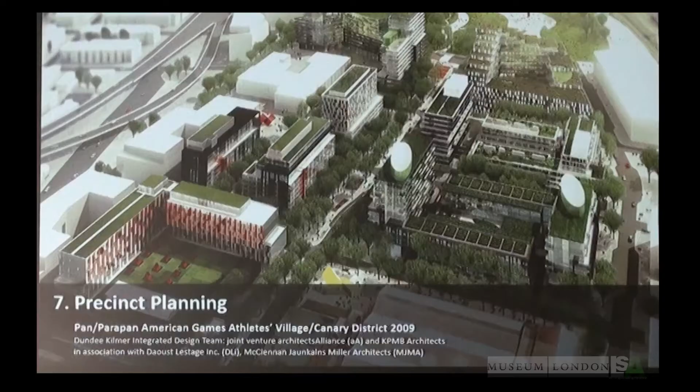We handed it over just last week. This is housing for 8,000 athletes coming to Toronto for the Pan American Games and the Parapan Games, which will then transition from athletes' housing into market rental housing.

George Brown College's student residence is this building, alongside market condominium buildings, which Toronto has so much of. The difference is this is fairly mid-rise compared to everything else. It's on Front Street and goes to a park, which is really fantastic—totally completed, Corktown Commons, which provides flood control from the Don River to the north, set within a series of blocks which we did not lay out.

They were laid out by others, and the public realm was designed by Greg Smallenberg from Vancouver, who's excellent—he did Vaughan City Hall. Renée Daoust, who's fantastic, from Montreal, was there. And we partnered with architectsAlliance, who did this building, with MJMA, who do the best recreation centers.

So we just put together, we curated the city we really want. And it's under construction—two heritage buildings, it's a brownfield site. The Canary Restaurant is there, and the other building is the C&R building, which will become a retail piece. The red frame is the Polyclinic, which will make a natural transition into a YMCA for the community. And the developer is subsidizing the retail because people are looking to buy into communities. Otherwise, the retail space will be empty forever.

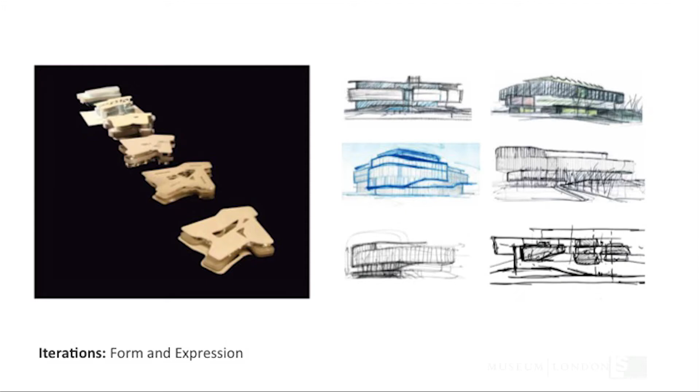These are all the different stages. The lake is out here. These are different sketches, some had berms. Actually, Peter Bohlin did a scheme like this. We were the only scheme that didn't have a 5-story atrium. By the size of the site and by the program, everybody was doing a 5-story building.

I asked them, what is the difference between a corporate headquarters and a school of management today? So the 4 buildings, this was our idea, that you would arrive from the west, the lake is here, you would see the lake, and you'd come to the middle, and you'd see Chicago. There's a line of sight to Chicago. There'd be 4 buildings, somehow you'd connect them.

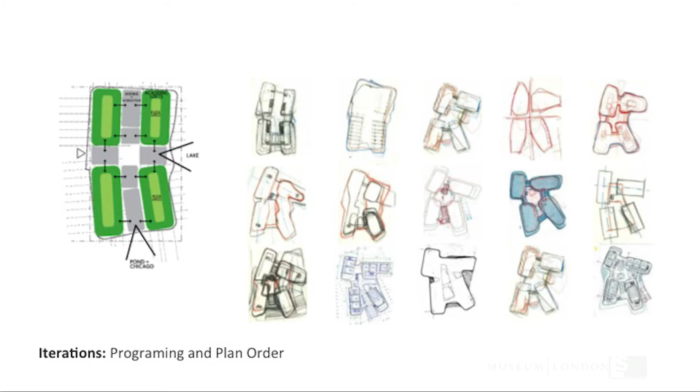We called them academic neighborhoods, so we're kind of using all these urban metaphors. And then you'll just see, we're just going round and round and round and round, looking at different ways to position and articulate them. Some of these are kind of nice, and some of them are kind of gawky, but we kept going round and round and round.

But essentially what we did is this is the line of sight to Chicago. You entered from the west, and there was this arena in the middle. I always speculated that Obama from Chicago would be giving a talk here. This is where you would get CNN doing a debate. It was about debate and confrontation. This is like the parliamentary system.

Every building implies a city. Every building is a construct. I'm more interested in architecture as a social construct than anything else.

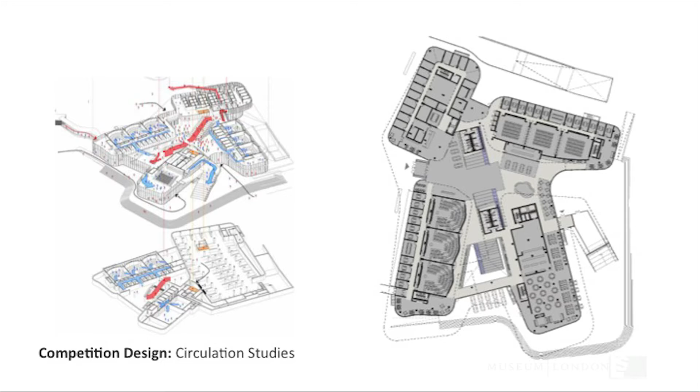There are 4 academic neighborhoods. We had, and I'm showing you 2 versions of this because this is what happened, we had classrooms here, and you'll see everything changing. I want to show you either the compromises or the skill we have in moving from point to point.

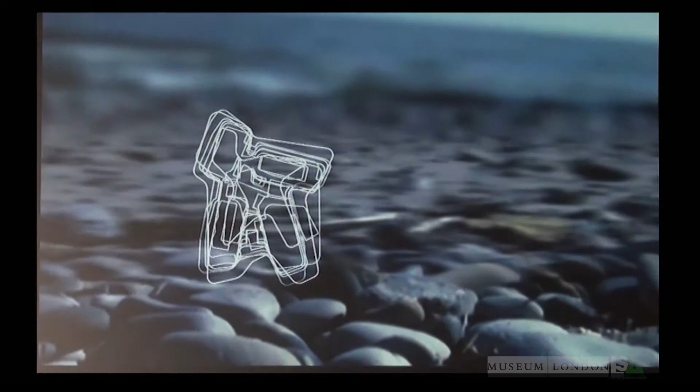We made this video in the competition. This was at our third interview. These are the rounded pebbles, or anything will get rounded out by water.

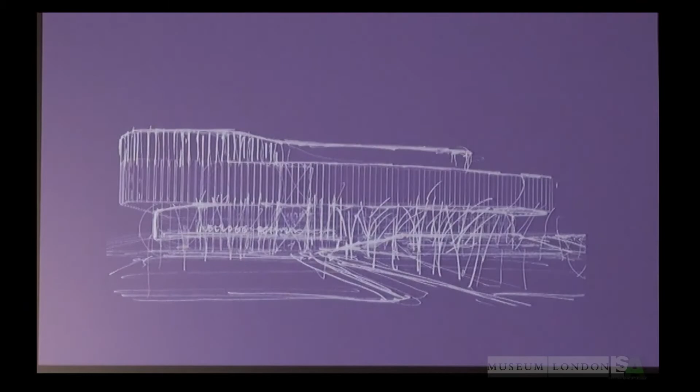We knew we were doing well because when they had 5 architects, KPF was always presenting last. In the first go-round, we presented second. By the 3rd interview, we were presenting 4th, so we knew we were in 2nd place.

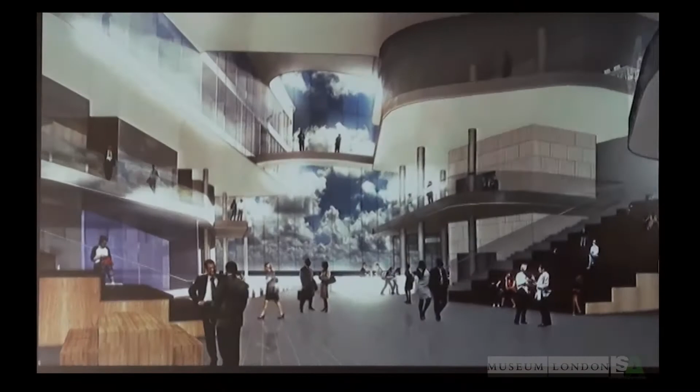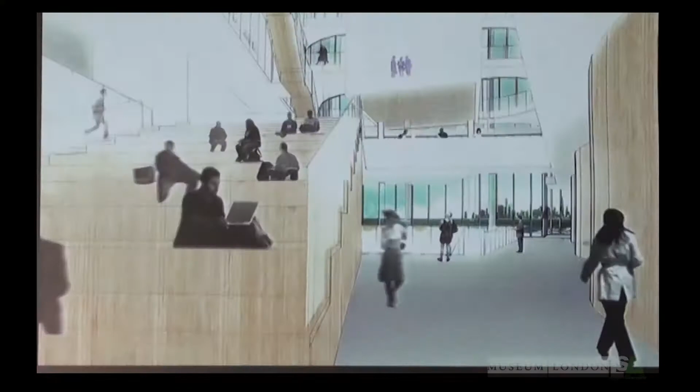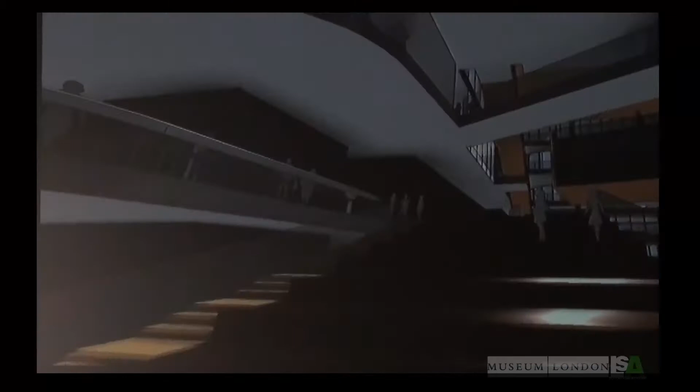It's interesting because they had so many faculty offices, like maybe something like 250 of them. They're all tenured faculty and they all want a view of the lake. And this plan produces a huge amount of perimeter because it's really 4 buildings and they're cinched into the middle.

This is our version of the Rotman, but the difference is it's all glass and you can see Chicago, and they wanted to use this in both directions. This is a model we did with an apron around it, terraces. And then I had the idea that it was like an Italian hill town.

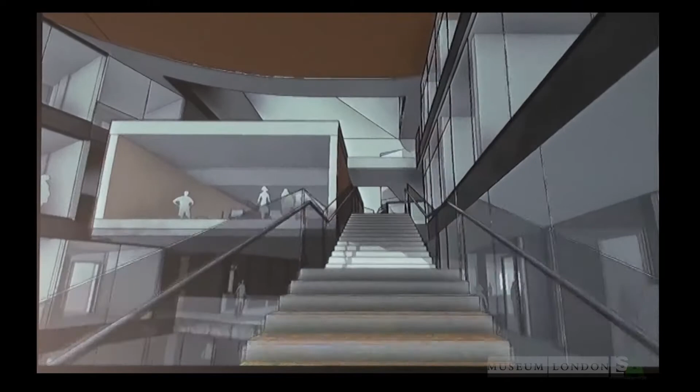After Rome, we went up and looked at some hill towns, and then the faculty said, you know what, we actually don't want students up on our floors. That's great, thank you.

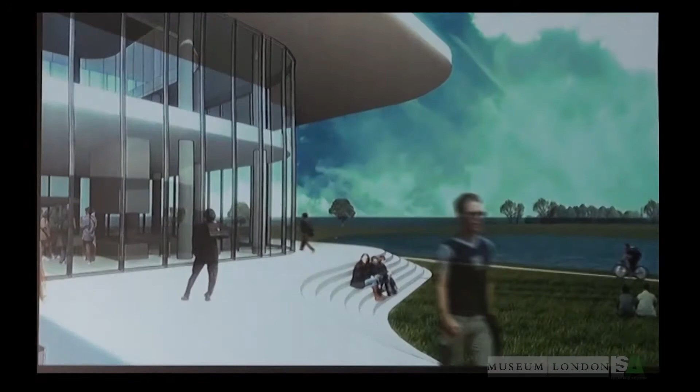These are the atriums that are in every neighborhood so that there was a sense of the local. One of the things that the corporate architects did is they made one big atrium and then nothing else. They have office in an atrium like a corporate headquarters. I said, there are many other places in any daily routine that you have to have. You can't just be in the atrium.

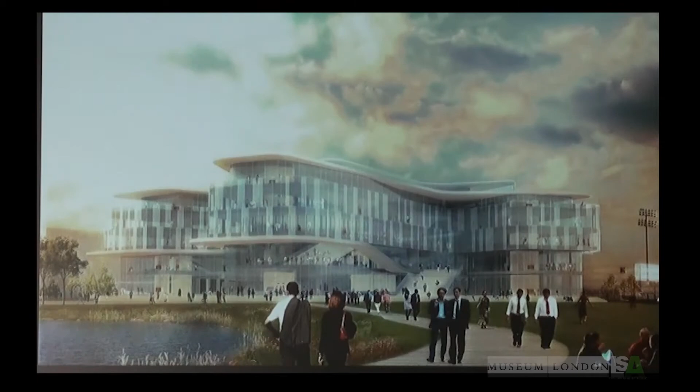So one of the guys who was doing the decision making is Gordon Segal, who's the CEO. He just stepped down from Crate and Barrel. So this was our scheme. You know, what is it?

They had an expression, intensively or excessively public. So the lower floors were excessively public, and the upper floors were faculty floors. So there was one floor in the lower level, and we got light to it, then 2 really big classroom floors, and they have other admissions and things like that. And then the upper floors were faculty, and there was a faculty commons because you had to bring those people all together. They wanted their own forum.

And that was our rendering.

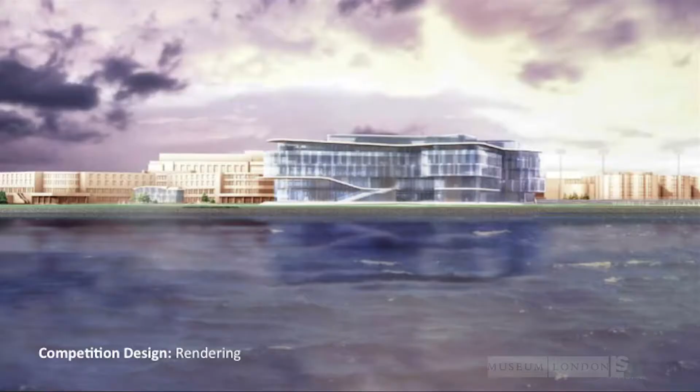This is the Allen Center, engineering, and it's 5 stories. And it had this really beautiful stair, it was a stone stair, and it was taken away in a blink. Just in a blink. It lasted about a month.

Then they called the next phase the fresh start. If anyone says that to you, you should really think about it. Don't accept it. But the fresh start meant that at the last interview, Gordon Segal saw the video and said, 'I really like the way you think.' He didn't say, 'I really like your design.' He said, 'We really want to work with you and your team, but we want to start again.'

So the next thing, and remember, they're Americans and they're in Chicago, and everything is big and bold in Chicago. It's just different. This is the Allen Center.

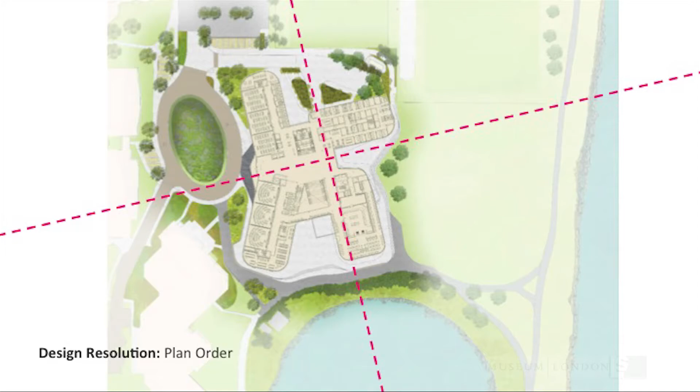They removed the parliamentary stair. That's what they did. First thing, why do you want that? You're blocking the view to Chicago. Be flexible.

They moved, all the classrooms came to this side. They wanted the presentation to the Oval to be the classrooms of Kellogg. And who was I to say no?

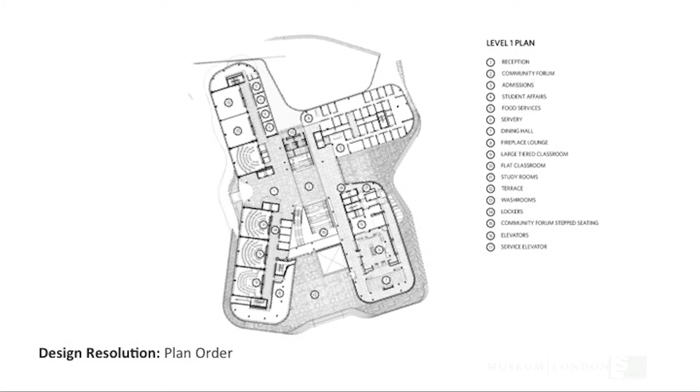And then you enter here. There's a lower level. There's a sunken courtyard here facing south. The cafeteria and dining room is here. At the ends of every loft are these stone elements, some of which have fireplaces in them, looking out to the lake, and there are lounges and study areas at the tips.

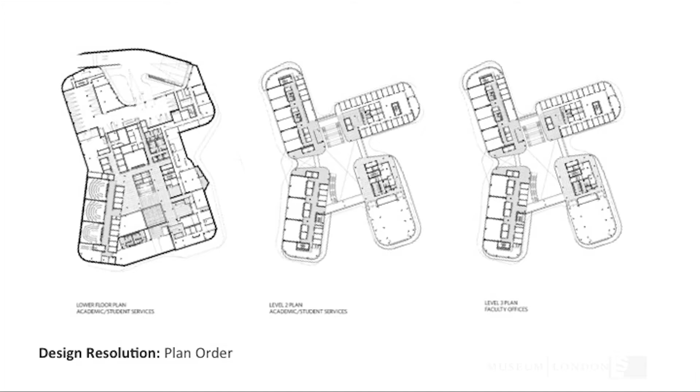And then, the service court, some lower level classrooms. This is a light court. There's a cafe that you'll see later. The 4 lofts have the idea that they would be bridge linked together. So there are bridges, but you leave your neighborhood and you go to another neighborhood.

This is an odd looking section because of the bow tie. It's like 2 bow ties, and it's very short, but this was from the competition where they then took this - well, no, this was what we're actually doing.

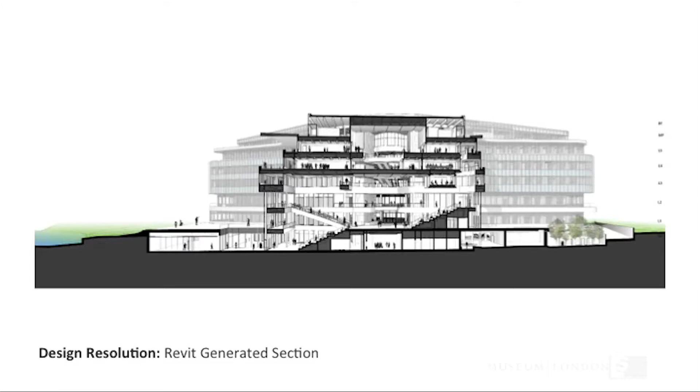This one is in elevation. We still have a stair, slightly curved, you're looking west. This is the south, there's the pond. This is below grade. And then upstairs you get these figures of these kind of courts. These things are in the clerestory, and they're bringing light down. All our mechanical is up there.

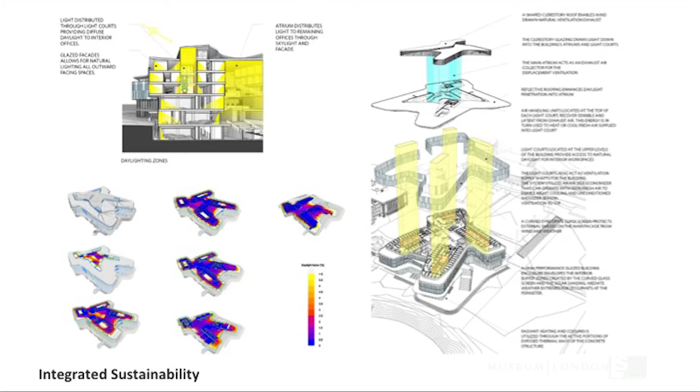So there's another figure, this piece. Sustainability has a lot of great daylighting. It has geothermal, it has a radiant slab for heating and cooling. But they're not as adventurous as Manitoba Hydro. It's odd, very conservative. So this is our building today.

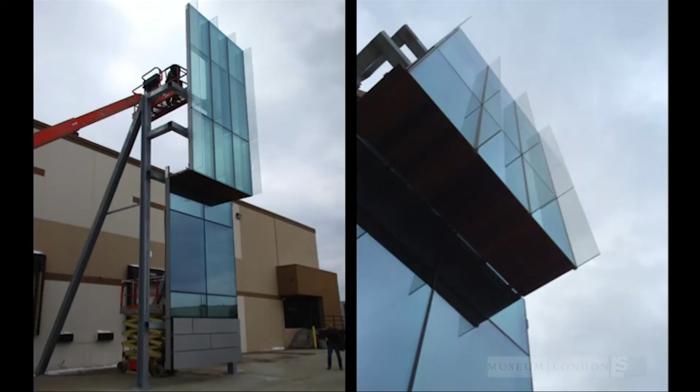When they have federal politicians come, congressmen and stuff, you can't get onto the oval. It's all security, and so this is our mock-up, which was in Indianapolis. This is the lower part, this is the upper part. So we just did a test in Fort Lauderdale, the technical test.

So this is the second video, which is very recent. This is where we are.

So you can say, well, did they compromise? What is it? What happened to all those? All the Chicago guys, they took away all of the loopy things. They took away the big stair, and they disciplined the building with us. And we got to, I think, a very good place with them.

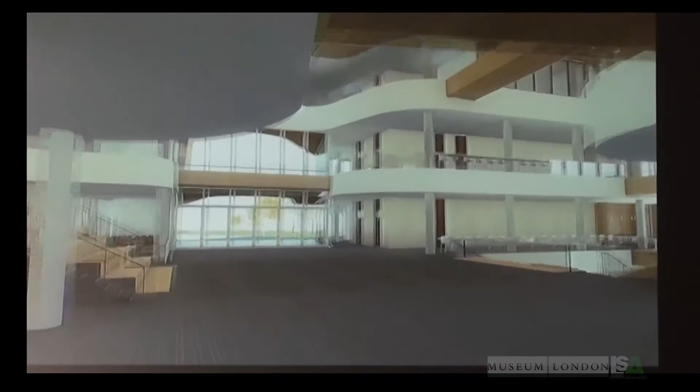This is coming in. You see the lake? The stair doesn't block your view of Chicago. Looking back at the entrance, you get all these innie things going on, and there's some interesting interreactions. Basically, the buildings, the lofts are quite rational. They're gridded, but the corners and the perimeter aren't.

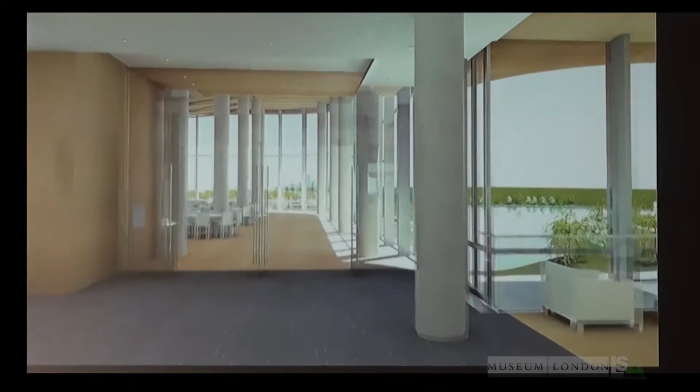We've never done anything like this. This is outside of our line of architecture, but I think we've earned the right to do this building. And I think it's going to be very, very exciting. There's a lot of great space in it. We said our motto was great space everywhere.

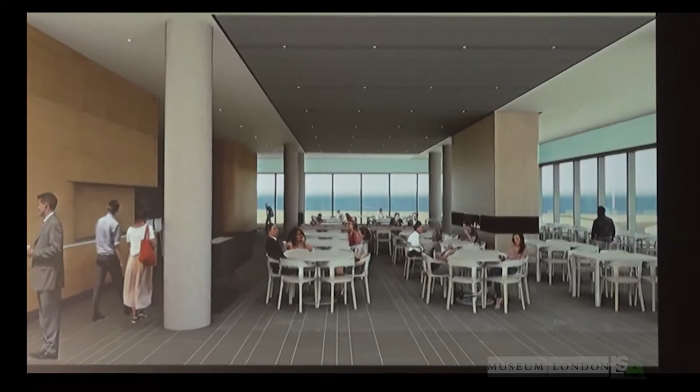This is their multi-purpose hall, which can be used in two directions, either towards Chicago or across the room. This is their cafeteria with the fireplace. You can eat on both sides of the fireplace.

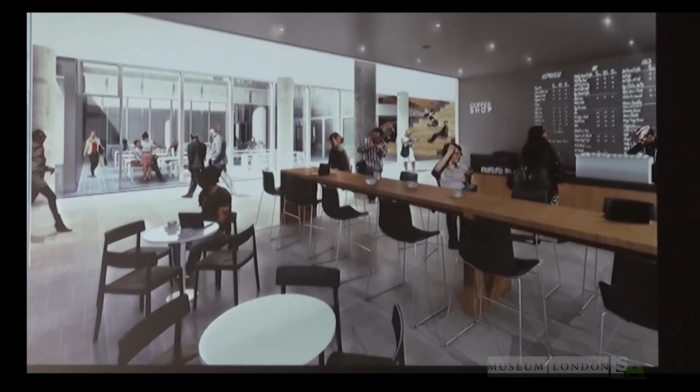Lower level with the open court. And then this is up on the faculty commons, where they don't want students to come. But all the faculty offices, it's like the crossroads for all faculty coming out of the 4 buildings. You can't get to the elevators without crossing. And then you get some neat innie spaces, like harbor type spaces.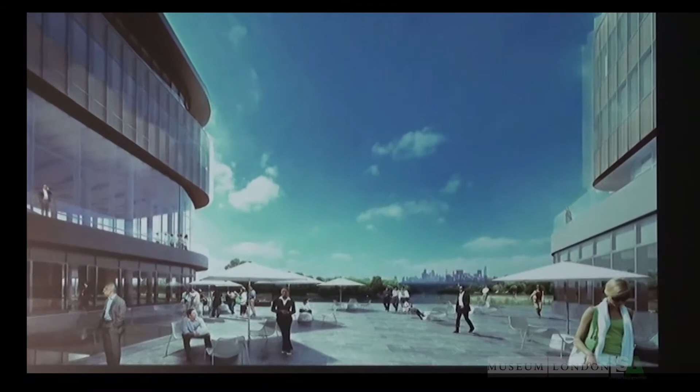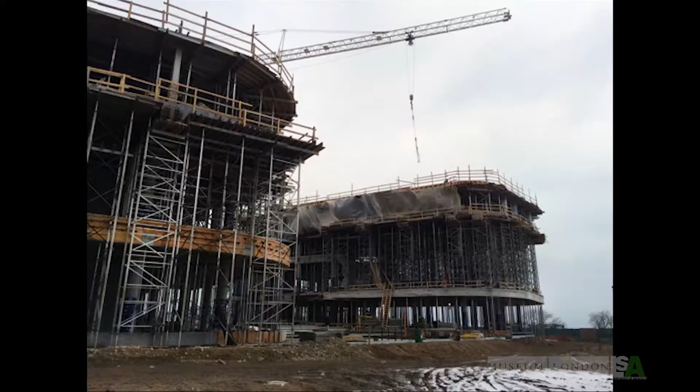And Chicago will always be there. So that's number 1. These are some construction shots. And now we've been asked to look at making additions to the Allen Center and connect it to the pond.

Okay, second project is - miraculously, I got a call from the chief architect from Princeton University, and he said, we're interested in having you compete for a project at Princeton. And there are 3 projects that you've done that we think are relevant to Princeton. One is the Canadian Museum of Nature. The second one is the James Stewart Center for Mathematics at McMaster. And the third one was the Gardiner Museum.

And the way it works is they're so focused on what they want. The president of Princeton was a Canadian, Shirley Tilghman. And at the interview, she welcomed us. She was very open, and she said, I was in Toronto and I went to the Gardiner Museum, I just want to say it's a beautiful building. And she presented us to the vice president, provost, all the project managers. And that kind of lowered the threshold for us.

So this building is the little magenta dot. Princeton is one of the great institutions in the world. This is Nassau Street, this is the campus, goes right down to Lake Carnegie. They own the golf course, they own this, they own the other side, all the way out to the highway. The high point of the campus, it's a river - it's like, I always thought it was a river, it's a lake, but it's sloping up and it crests about here. This building and plaza, this is the Scudder Plaza, and it's where Minoru Yamasaki, the World Trade Center architect,

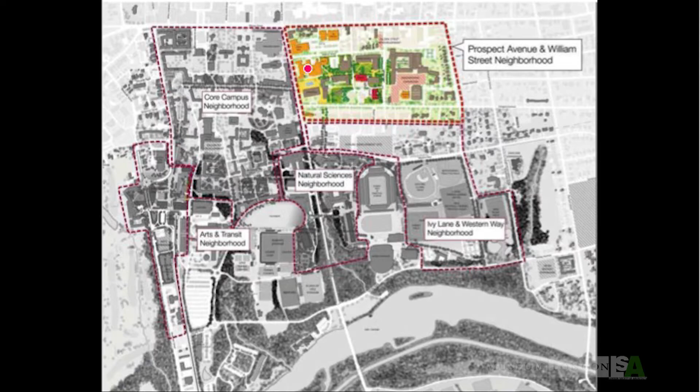Okay, so then the outlier is this Minoru Yamasaki building with this amazing piece of sculpture in a pool. But what do you think he was thinking about? I think he was thinking about the Acropolis. This was a time maybe like a kind of Lincoln Center, that kind of classical modern with these tall forms—it's actually really beautiful, architecturally really beautiful.

Woodrow Wilson School should—these are Ai Weiwei's zodiac sculptures. So Princeton sees art in the landscape as kind of placemaking and wayfinding. But the art they have, it's not just any old art. I mean, this is an amazing piece by one of the great artists of our time.

Our building here flanks onto it, and there was a long continuous bench and magnolia trees here. And this is part of our building. This was the original 1929 building, and this is a 1960s building. There's McCosh Hall, and the chapel is just on the other side, so it's extraordinary. But there was a divided world because of this wall, and it's a beautiful bench—the profile of it is so beautiful.

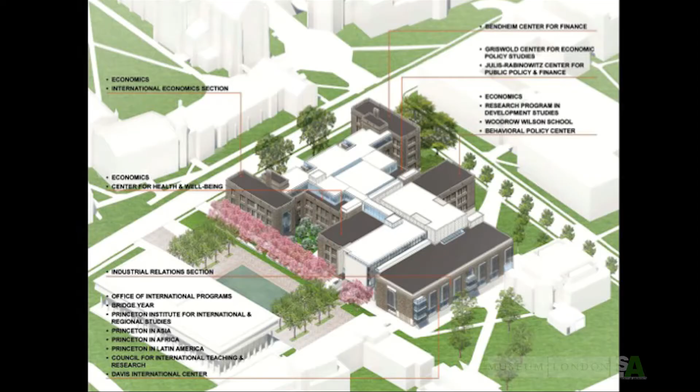So what we did is we were working for economics and international initiatives, and they're completely different. What I've learned with economics departments is they want to be in a silo. At every university I've worked in—we work at Pennsylvania, we work at Northwestern—they want to be amongst themselves, they don't want to actually connect with anybody else. We want them to connect, and we want the university to move through it. I think that's what a university is about.

The international initiatives got this piece of the building, smaller, the modern wing. And this building is very classical, and then it starts to break down. And this is Shapiro Walk. This is the whole zone where Michael Van Valkenburgh—this is a good example where the landscape architect made a significant intervention that will change the campus.

And then we went up top and we said, well, we're going to expand on top, we're going to fill in this. Their master plan said take out the lecture hall that was, I think, done in the 70s in a courtyard, get rid of it and think about something else. So we took off all of the heavy penthouses, which were for lab exhaust, and we then have our own mechanical penthouses, which are much, much smaller.

So there's heritage, there's campus, and I read this as the campus as a whole—the heritage piece was here, and as you go east and south, it got more modern. In fact, you get this proto-modern thing here. And we're saying, let's make a connected world. The plan looks, you know, in a way you'd say that's a really boring plan, but it's actually really, for me, really beautiful where everything has, I think, a natural fit.

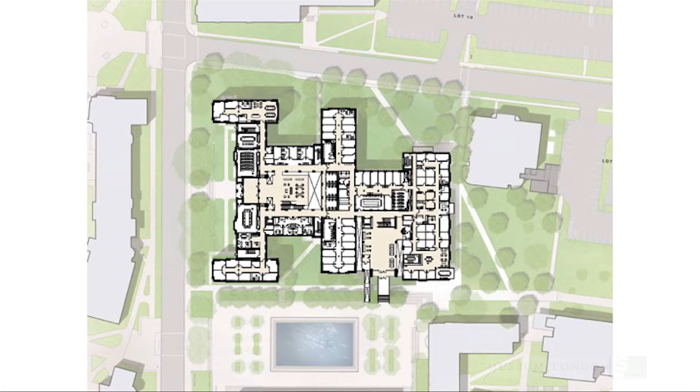There are two atriums. This is international initiatives, very outward. Economics is very internal. And then there are heritage rooms in here that we had to deal with, and it gets more modern, more modern, more modern. It just gets more open. So for us, it was a discourse on architecture across time.

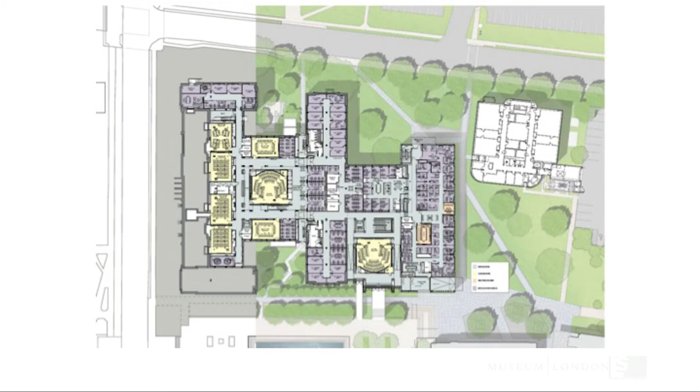This is the lowest level. So the last floor was up at Washington. This level is down at Shapiro Walk. We took out a bridge here to unplug this because this is going to be more of a pedestrian through route, because you can go up to Nassau where all the restaurants are. We actually bridge over this, which was pretty moat-like, and then you'll see that we're actually bridging over this and going into our international initiatives, because this is the one that gives us the link to the Woodrow Wilson School.

And then we have three glass pavilions. These are the heritage chimneys, and the ends are raised up, but it's really beautiful.

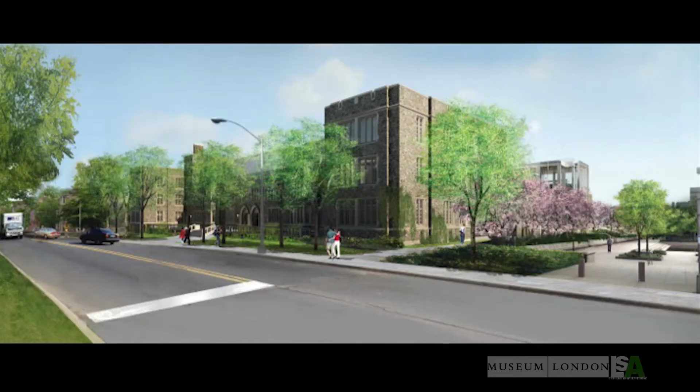So in these rooms, this is the building, so these are just studies, but these were the magnolias. We were accepting this, we thought this was totally fixed, you can't change it, it's the magnolias. The landscape architect who has oversight over the master plan as well said, no, you can change it, in fact, it's a good idea and we're gonna change it. So they took out this wall, they cut down the trees because they had fulfilled their life cycle, and we thought there'd be a major protest, and there wasn't.

And we're connecting over this, so this is open now to Scudder. There's still a retention wall and there'll be seating. This is our new atrium piece. These are all redone, the heritage building. Economics are really happy now, which is what I want them to be.

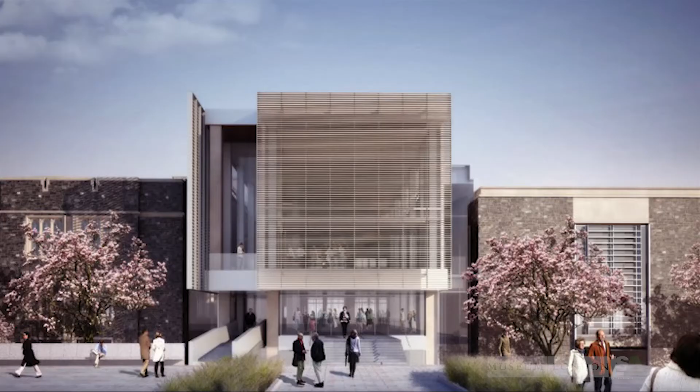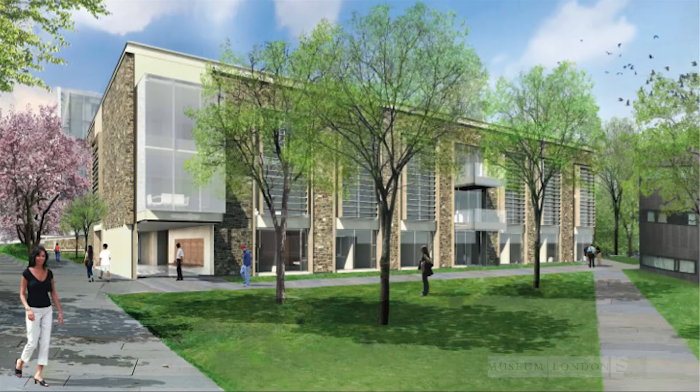This is our entrance, handicapped access, a big stair, and these are stone. This is like what we did at the Gardner, but you're basically facing south, so we're trying to do a kind of screen for that. This is a 1960s building, and this is Argillite, which is a kind of purple and gray - Princeton's got a lot of this. And all we did is try to clean up the facade.

We removed a 1990s addition by Payette, who are very good architects, but they did a very bad addition to the 60s building for chemistry. It was about 10 feet wide and had work areas for researchers. We just stripped it right off, went back to 1960, cleaned it up, made a second entrance off of Shapiro Walk. This goes through and changed the stair. Michael did this, changed the stair up to Scudder and tried to make this a real intersection of convergence.

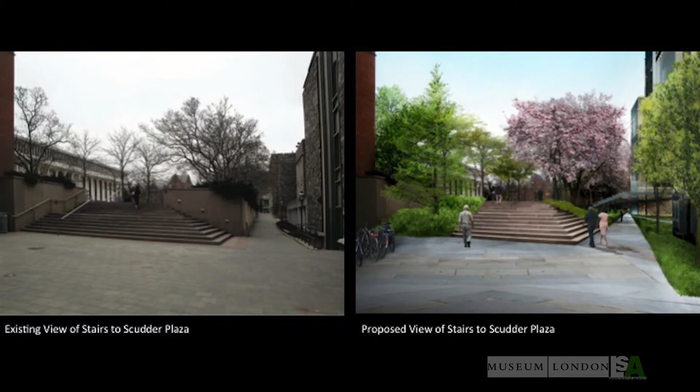So that's how it is. He took this down, I think it's a great move, and I couldn't have made that proposal - I thought I'd be kicked off the campus. But it opens it all up, and the green is now bermed back. So when you're looking out of our building, you actually see onto the plaza and you see the foreground.

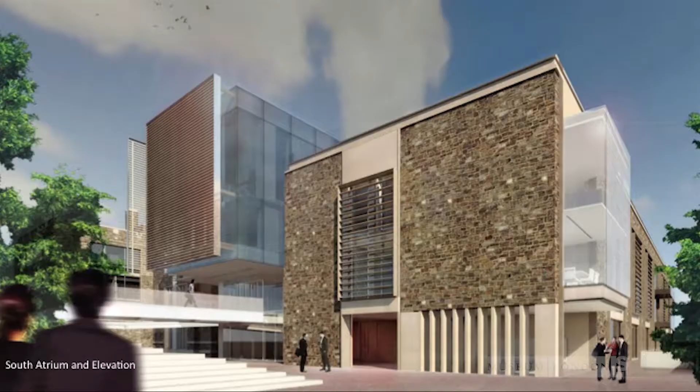So this is our stuff. This looks weird, this slide - there's something going on with the projector.

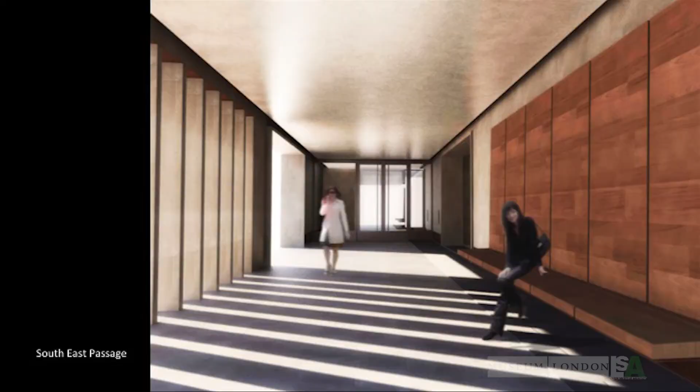But anyway, back to here, just to point this out, that at Princeton there are a lot of outdoor covered areas that are Gothic punches that walk through residences. Like you're inside, you're then covered outside, then you go through, you're in another courtyard. We wanted to give the 1960s, which was not interested in any of this, some quality and character, and to make a place where people would gather before you actually go into the building.

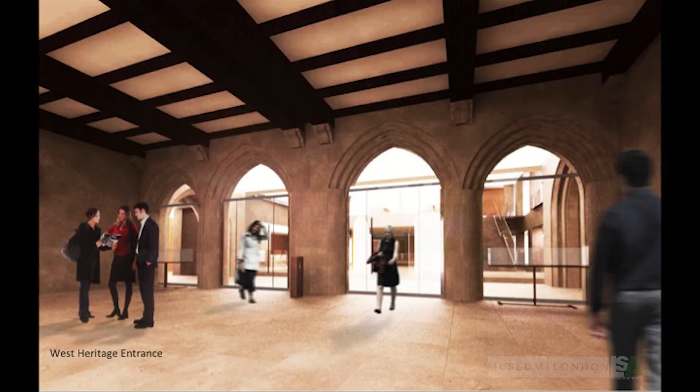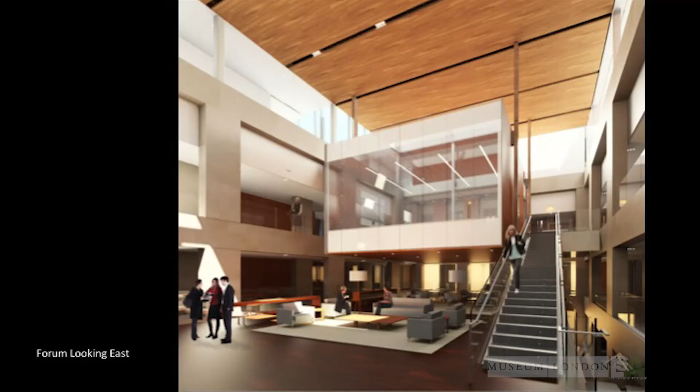This is in the old building coming off of Washington, so it looks like the Parliament center block. It's all stone. And when you go into the courtyard, we stripped out everything, we just gutted it all. And then we're making a room that gets clerestory light, has an acoustic wood ceiling, and a floating conference room that can be divided for economics. If you go down this stair, you go down to the lower level and through.

And what we did is we worked with them - they're very challenging to work with because they're so intelligent, but there were different concepts that we called study and living room and lounge. And they eventually settled on this.

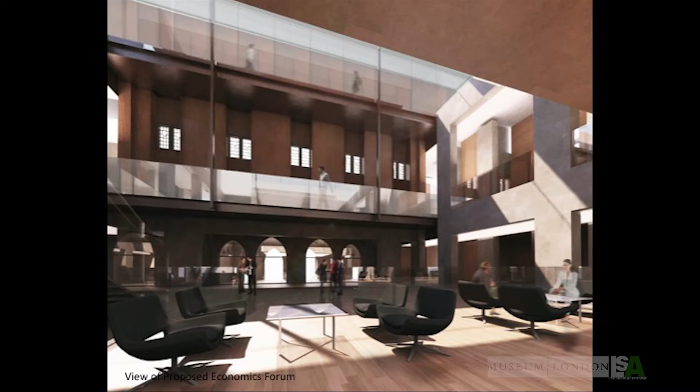And then looking back to Washington, this is kind of fantastic. There are bridges that are hung, and you see the layers of heritage, the new system, a bridge over the stone faces of the sidewalls of the atrium, the Gothic punch. I mean, I love this sort of stuff. It's layers and layers and layers. I like complexity.

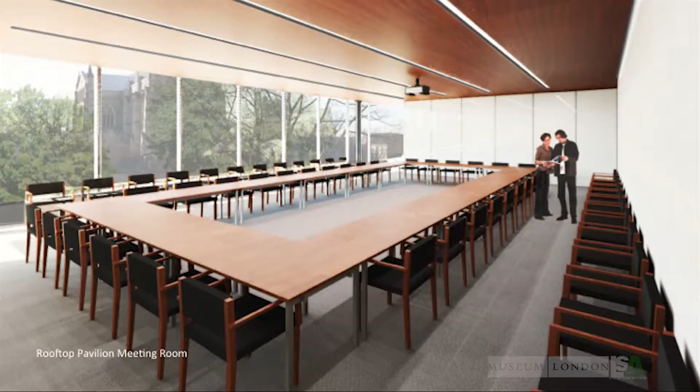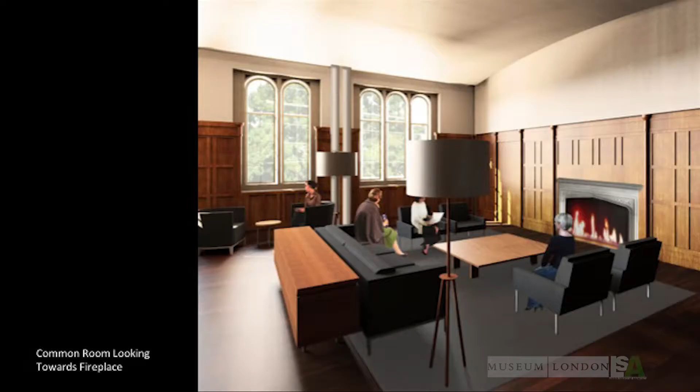This is up on the roof where we realize you're in the treetop layer of space of the campus. The best architecture is visible from our glass meeting rooms, and they love these rooms. They're going to be really fantastic. And then the best of heritage, where we took one of the reading rooms that was there in their library, and we converted it into a faculty lounge, which, really.

And then the corridors. We said, let's not make corridors. Let's try to think about the halls as almost exterior spaces. So they're stone, like the columns are stone. And then there were little setbacks like this that I think are really interesting, where you go into different departments and we're moving from the heritage to the

new. And then the building's beautiful. The tweed coat is beautiful. And then the classrooms, you're at Princeton, they wanted intimacy, and we wanted the acoustic wrap.

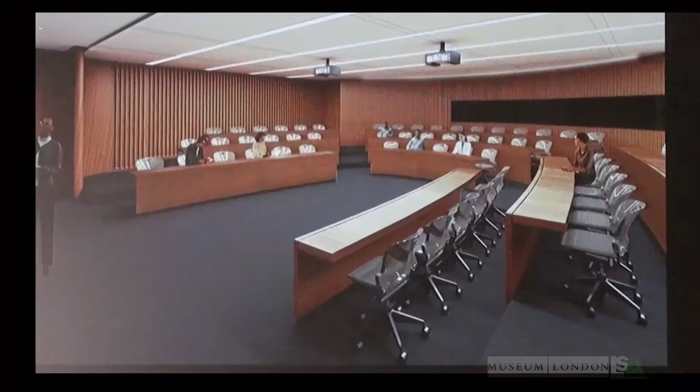And so these are kind of modified, but they're small. Everything at Princeton's smaller. The total student body is under 8,000. And catch this, the ratio of faculty to students is 1 to 5 at Princeton. That's intimacy.

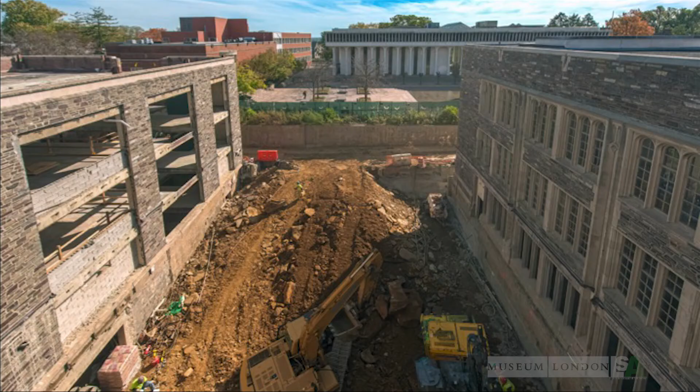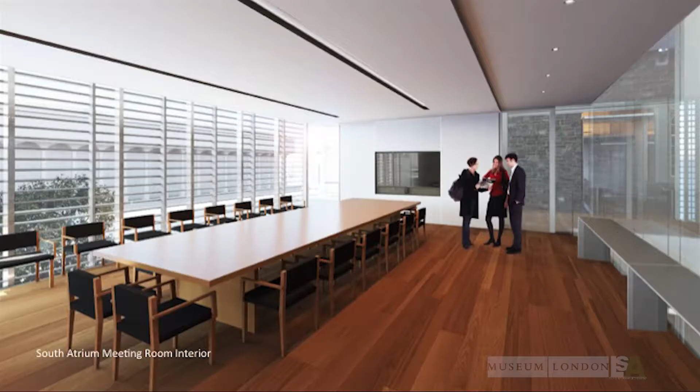At Princeton, you have to really depict everything. They want to see everything. There's not a single rendering that tells the story of the project, but it's very, very complex, and it's very big. And there's another meeting room for international initiatives that looks over Woodrow Wilson.

Okay, last project. Another competition. Ken Greenberg, who is one of the best urban thinkers, I'd say in the world, but for sure in Canada, but he was actually the acting planning director of Boston, even though he lived in Toronto. That's how highly they thought of him. He's a really good thinker.

He worked with them on the master plan for BU. So you get the Charles River and you get MIT and Harvard on the other side, the really major brands. And BU doesn't have the kind of endowment or fundraising capacity, but they wanted to rethink their campus, and it's a kind of a noodle of a campus.

And you see this green system, it goes from Olmsted's Boston Garden, the gardens, Commonwealth Avenue comes right through the campus, and they have other medical campuses that are kind of way out there.

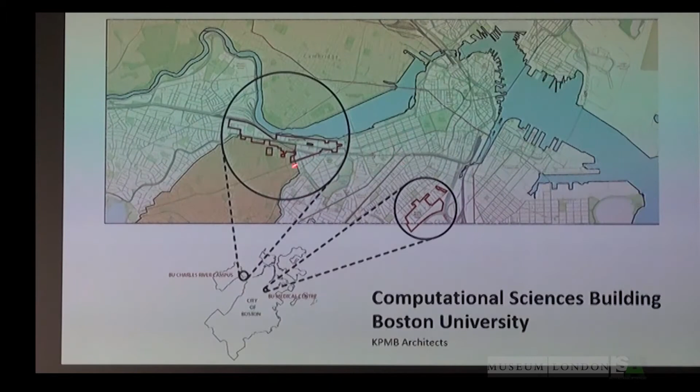But in this section, the proposition that BU put out, and I haven't seen this quite anywhere, which I think is their initiative, which is they're saying that computational sciences are the tool for all problem solving across all disciplines, whether it's public health policy, whether it's mathematics or engineering, which it comes out of, but they're saying for everything else. And so they said, we want to make a hub, a building, which is a convergence of every discipline on Commonwealth Avenue. And we're going to hold a competition, so guess what?

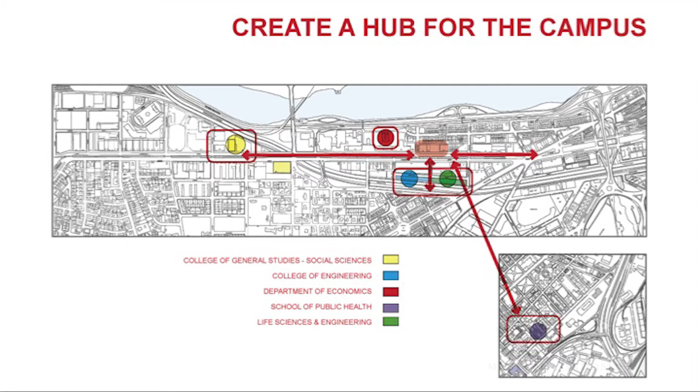But we had a line of thought, and it was about trying to draw Commonwealth Avenue into the building. And there's the site, it's a parking lot. This is the Sargent building. This is beautiful. These are all Boston,

Bay State Road, all the residences are here. This is, I think this is Cram and Goodhue, who did a lot of the American campuses. And then Sert did the tower, kind of back, it's now being converted into law school.

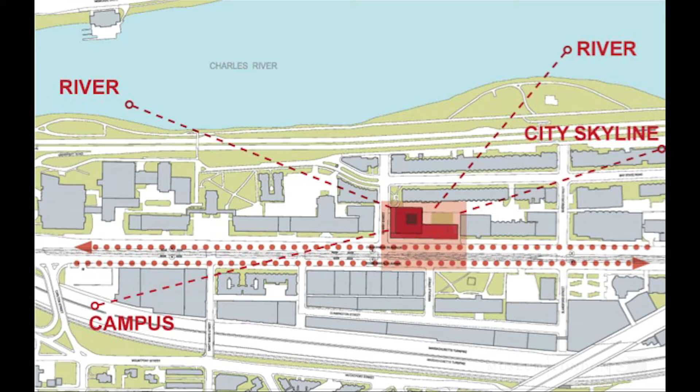And they're trying to get this connection happening too on this Granby Street. They're three of the ugliest towers I've ever seen, student residences here. They're really bad, but this is really great. This is great city building.

Frederick Law Olmsted and all the lucky cities that he did work in have a true legacy. You get Commonwealth Avenue, all of the Back Bay area—this was nothing. This was all landfill. It's totally artificial. That's why I love it.

This is it today, and so very Boston, lots of students. This is the School of Management, which is a big, heavy building, but some great trees, and they also have transit here. So here's our building. These are the residences, which I hope you concur with my assessment, but that's what they are—got to call it as you see it. This is the Sargent building.

There's a kind of datum level through Commonwealth Avenue. These are Cram's buildings, which are Collegiate Gothic. What we wanted to do was create a more transparent base and a sheltered protection, an overhang that takes you to the Charles River, a laneway connection between us and the Sargent building, and a roof terrace, much like we did in vertical campus. Then, through the shifting of the plan, a series of outdoor terraces related to stacked neighborhoods in a vertical campus, plus a system of interconnecting stairs—not that anyone would interconnect. This is, I think, 15 floors, but you'll see how this plays out.

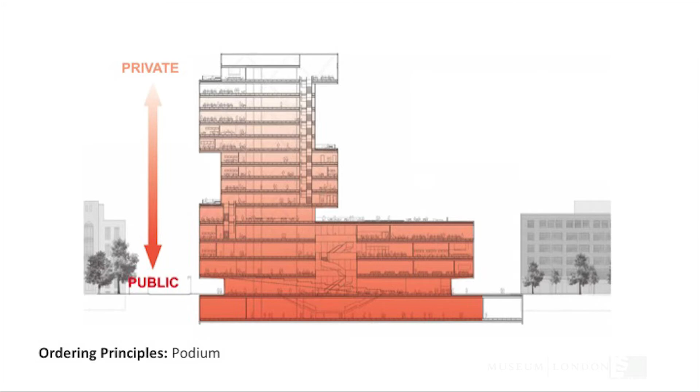So this is the big flow. Like at the change of class, this is a parade, and these crosswalks come right into our building. The traffic lights, streetcars are here, heavy traffic on Commonwealth. We take them to the center.

There's a podium, and then this tower. The tower is cantilevered in different directions because they own the lane, and the site is tight, and you had to anticipate another 100,000 square foot building. This building's about 200,000 square feet.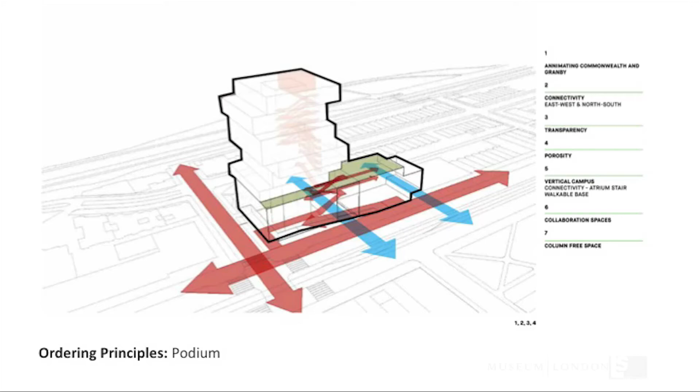So we had a central atrium, a kind of cladding system, and a stacking idea where shared classrooms and collaborative space were low—these are high traffic. Then you'd get mathematics, computer science, and the Hariri Institute, which is well funded, at the top—they were always going to be at the top. Then central administration and some labs having supervision over the terrace. That was the scheme.

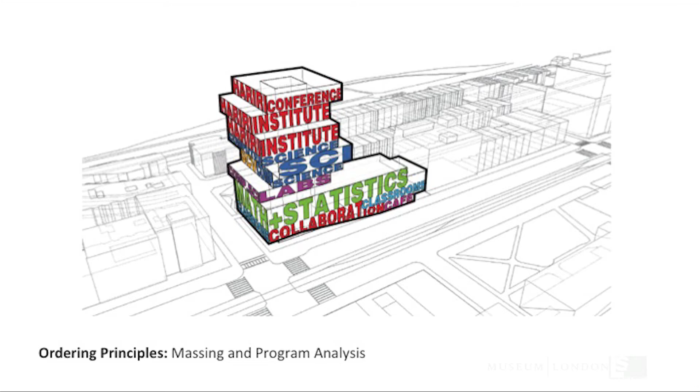So this is walkable, there's outdoor stuff, this is admin, math and stats—they didn't mind, they were the only people. These people are pretty bunkered in; they really want to not be connected, but we want them to connect.

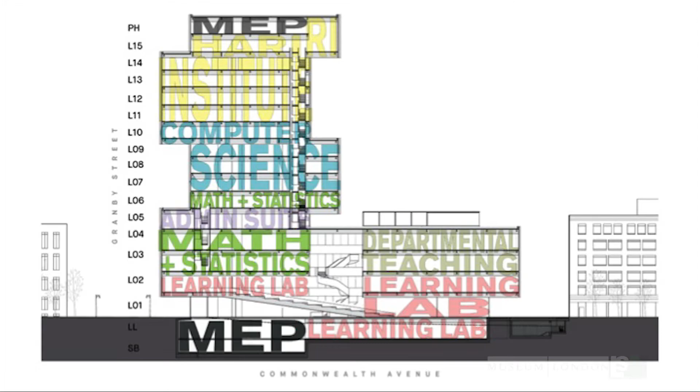Then we have a terracotta system—there's a lot of work to be done on this yet—but there's a series of terraces that parallel Commonwealth and lift up to the entrance. So you can enter the building here and come up. This is admin, and it sort of spirals around and looks out over the river.

The typical floor has a constant core, and it's a steel building. Boston and Philadelphia are both steel buildings—I never realized that. Toronto has a lot of concrete and steel, but certain cities, it has to do with history, the power of certain construction companies and suppliers. But anyways, they're steel cities. Most buildings are steel; there are some concrete, but most are steel.

So these are cantilevered. We worked with Barry Charnish, who's a great engineer, great structural engineer, and we looked at a 12-foot grid, at 11, 10 and a half—many, many things. So this is a 12-foot grid, 12-foot wide offices. Then you go 24 for certain rooms, and 40, 48.

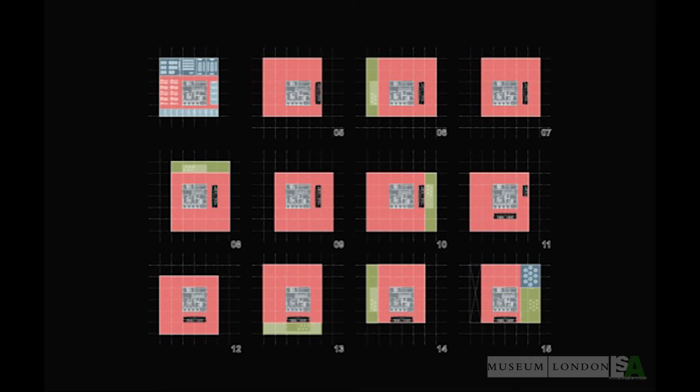These are the plans, which kind of just rotate around the core. But every time you see the green, you're getting a terrace. So it's a very nice systematic way to break down a tall building into a vertical campus, totally engaged with Commonwealth Avenue.

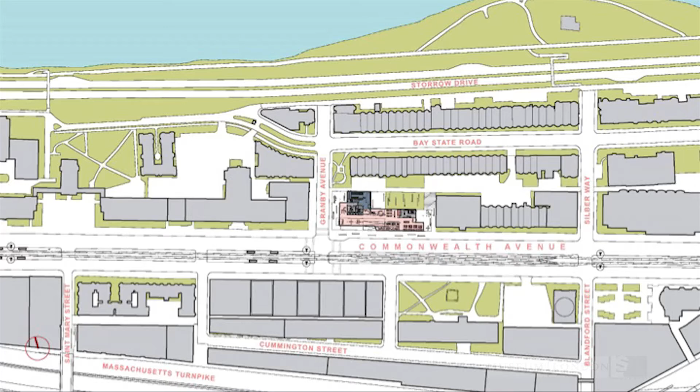And then we looked at the lane and looked at the landscaping behind these townhouses, which are student residences now but may become institutes. So we're developing a whole precinct of academic life where this is the epicenter of computational sciences at BU. Bike storage is in here. This is a temporary landscape where another smaller building can come later.

This is the section, it's all steel. They're interconnecting stairs. The ground floor—what's interesting is the director of the Hariri Institute said...

I don't want it to be about computers, it's about people. I want the ground floor to have the buzz of people hanging out and dealing with problems spontaneously.

So it's pretty open, there's a hole to below, there's a cafe, there are outdoor places and whiteboards outside the building, in between, on the face of an adjacent building which would really be a party wall. And there's lounges wrapping the core.

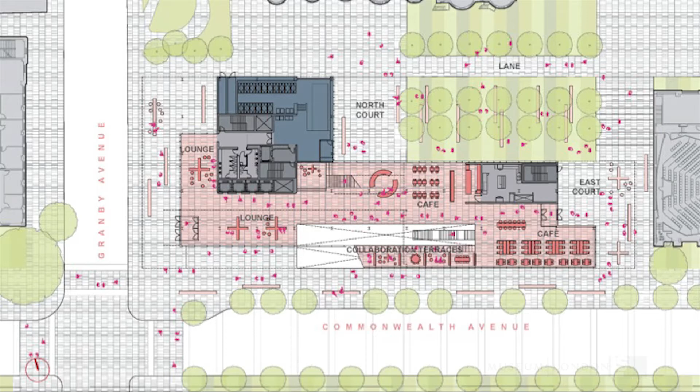This is all service, trucks and all that. No parking—another no parking, because you're on a transit line and most students don't have cars.

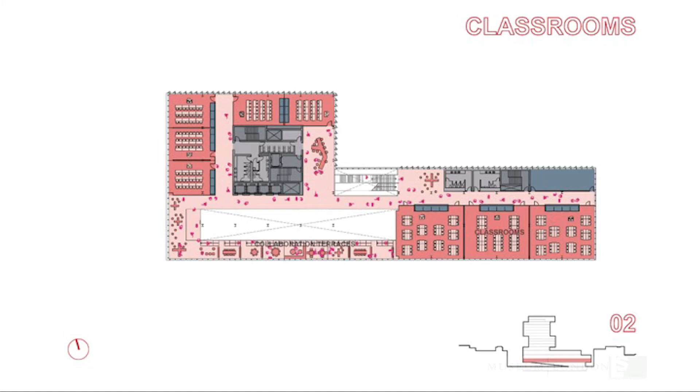The podium has simple classrooms within the framework, the linear atrium, the cascade coming up through here. This is an argument, especially with the ADA, but the top is accessible, the bottom is accessible, and this may go through a bump and grind, but they love the idea, and they want to be able to argue for it to get a building permit.

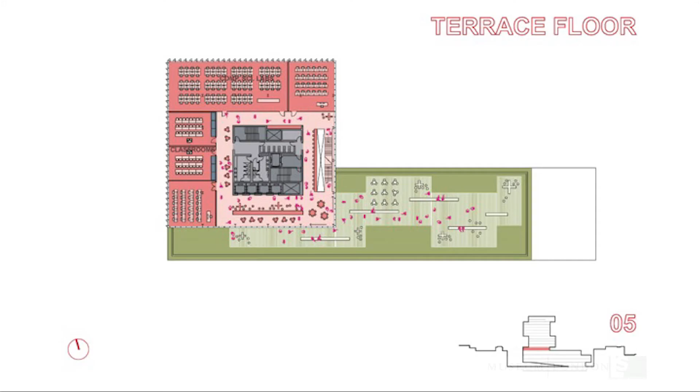Typical floors—these have all been worked out with the users. Wait, we should go back to that one. So at this floor level, this was when it showed all classrooms, and it's been switched because the president of BU said no one will supervise this. So we have administrative functions at this level, because they love the idea of an outdoor deck, but they want one that has some eyes on it, some people responsible for it, and there are liabilities that relate to that.

So we showed this video. I think this video won the competition for us.

I told them we wanted to give Harvard and MIT building envy.

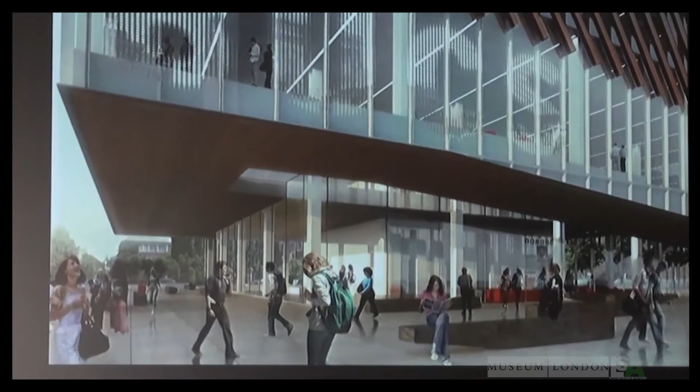And at the end of the day, it kind of looks like an architect's office. That's what I think—I think architects have a lot to, they do it all the time. I mean, your office is actually probably open.

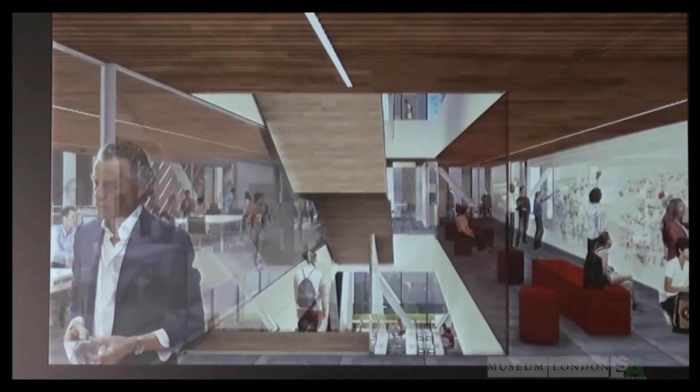The core is wrapped in white glass.

The finishes are really pretty Spartan. It's not about the finishes, it's about the idea of the building, which they love. The mathematicians, they love the building.

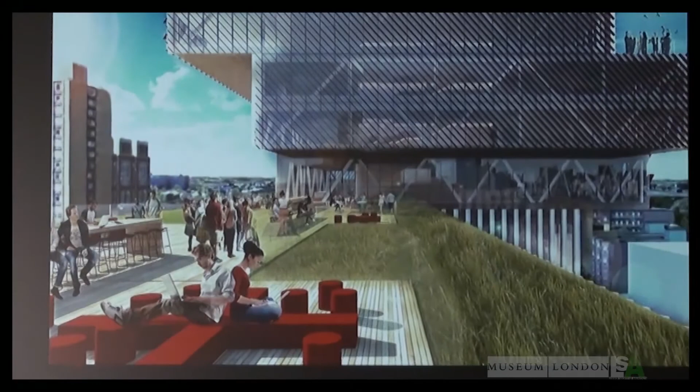We got a standing ovation for this—for only the Fenway Park part of it.

So that's the work. You know, every building implies a city. Your career as an architect is a kind of evolving, rolling, intellectual trajectory where, if you're really smart, you're able to make something of every big perception that you have.